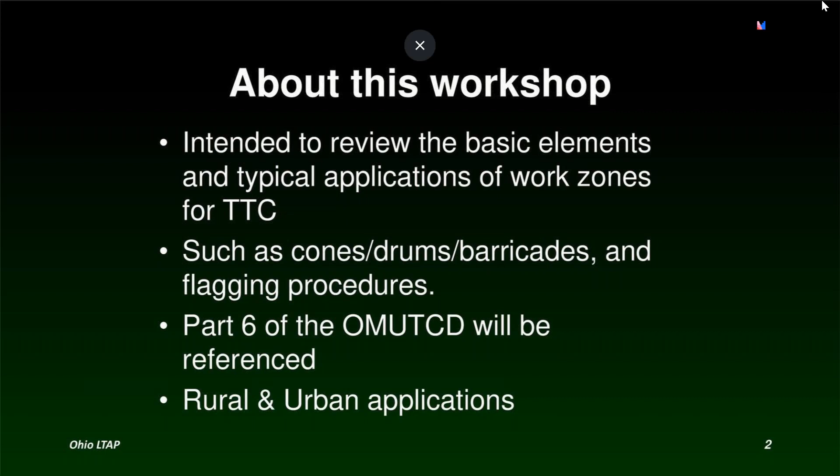So our learning objectives today: hopefully we'll be learning a basic understanding and awareness of temporary traffic control concepts, and we'll be talking about the standards involved for temporary traffic control. Standards is a very important word. It's a word that's tied to each of our typical applications in our temporary traffic control manual.

It has to do with a minimum level of safety that is part of each one of these 46 different work zone situations, depending on the type of road, whether it's a 2-lane road, maybe up to a freeway, and everything in between, and maybe intersections.

And then also we'll be realizing the importance of setting up our work zone properly, the way that this manual tells us to, so that we can make our work zones as safe as possible for both the workers and the motorists and all other road users, from pedestrians to the big trucks, etc.

So the way this webinar series is going to work, we'll start out talking about fundamental principles of temporary traffic control, and then the remainder of the day today will be focusing in on different traffic control devices and safety hardware.

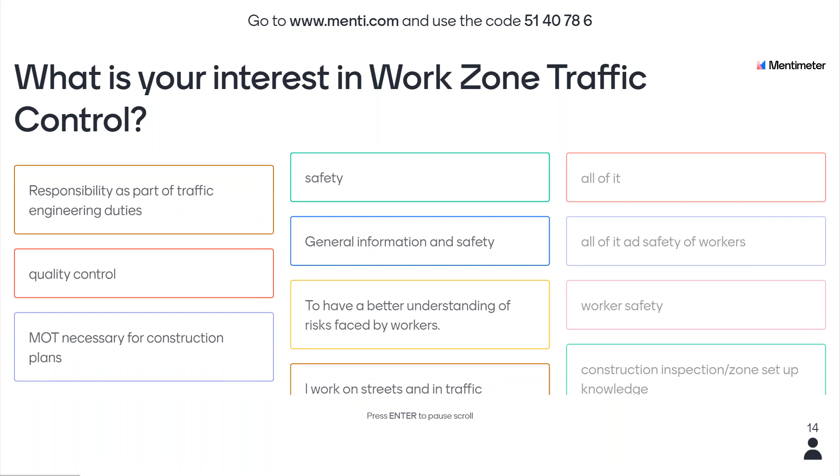What else? Construction inspection. Okay, we're getting a lot of answers. I work on streets and in traffic. All right, see a lot of safety. So we're definitely going to focus on safety, not just for the workers, but for the motorists as well, and how to determine the minimum level of safety for each typical application, and also how to enhance it with different devices, adding more devices, or in some situations having a police officer on hand with their lights turned on. So these are all examples of how to enhance safety. Quality control, very good. So these are very good answers.

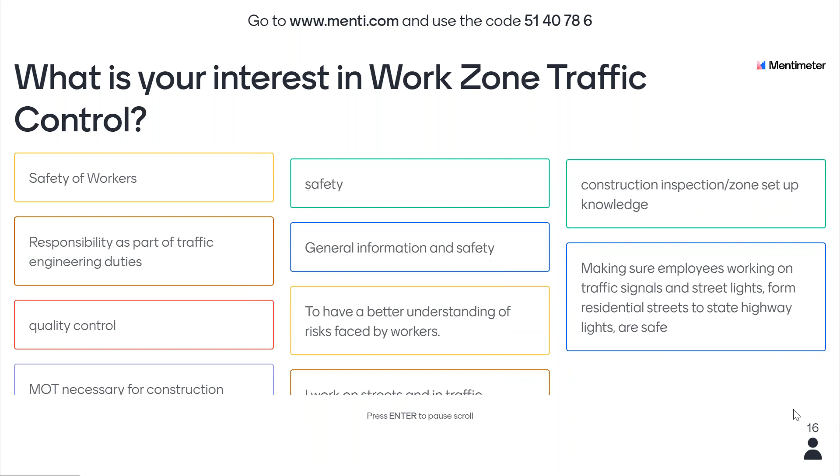Okay, so let's start out today with lesson 1. We're going to talk about the fundamental principles of temporary traffic control, and we'll be exploring some different reference manuals that you should all know about, and how to get your own copies of or view them online. And we'll talk about some roadway safety statistics when it comes to work zones, like crash statistics, what kind of crashes usually happen in work zones, and what we can do to lessen the number of those types of crashes.

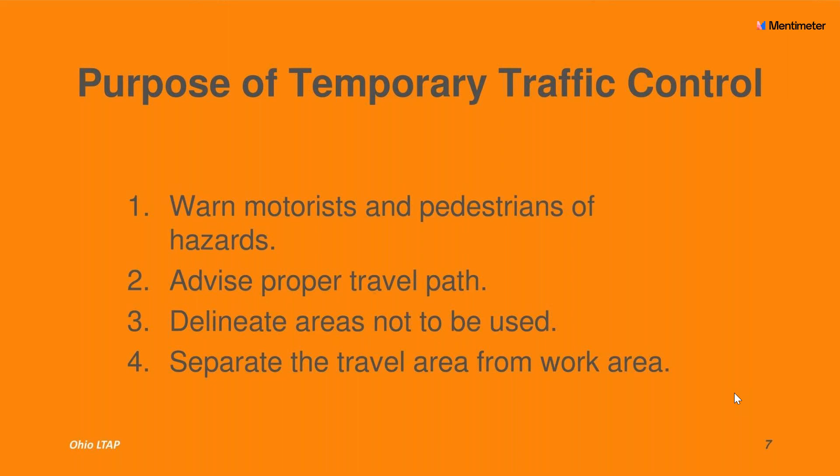First of all, what is the purpose of temporary traffic control? We got our top 4 purposes. One is we need to warn the motorists, pedestrians, or all road users that we are out there working on the roadways and streets, and they need to know that we're there before they arrive at our work zone, so they can adjust their driving, maybe slow down, pay more attention. We need to advise them of the proper travel path around our work zones, and we need to make sure we use the proper temporary traffic control devices to delineate the areas for them not to use, and separate their travel area from our work area.

We define temporary traffic control in our work zones as a system to communicate with road users to safely guide them through a roadway affected by construction, reconstruction, maintenance activities, utility operations, disasters, special events, and incidents. So sometimes we're not just using temporary traffic control for work zones, sometimes we have special events. Sooner or later we'll get back to normal life and have things like 4th of July events and Labor Day parades. Maybe some of you that work in cities or villages are familiar with setting up road closures to allow these events to take place.

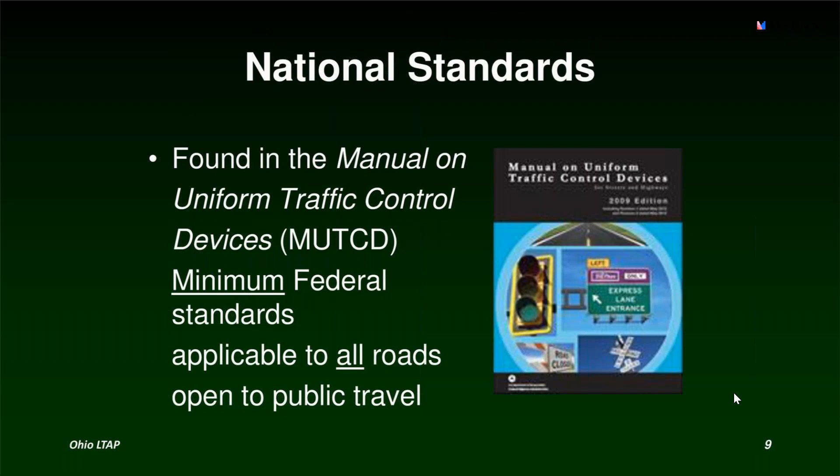So this is the manual we use to help us design all of our traffic situations. There's 9 different parts to this manual, and this is what it looks like in its entirety. You'll notice the latest edition is the 2012 edition, so that's 8 years old. And if you noticed, the national manual was the 2009 edition. They are working really hard to come up with the next edition, but they're doing a lot of research, they don't just want to simply roll out something like the one before. There's a lot of research projects to try to make some typical applications safer, like mobile operations. They want to study how to make mobile operations safer, and then take that information and put it into the typical application.

This is Part 6 of the OMUTCD, otherwise known as the Temporary Traffic Control Manual. Some people call it the Orange Book, but again, it's the 2012 edition.

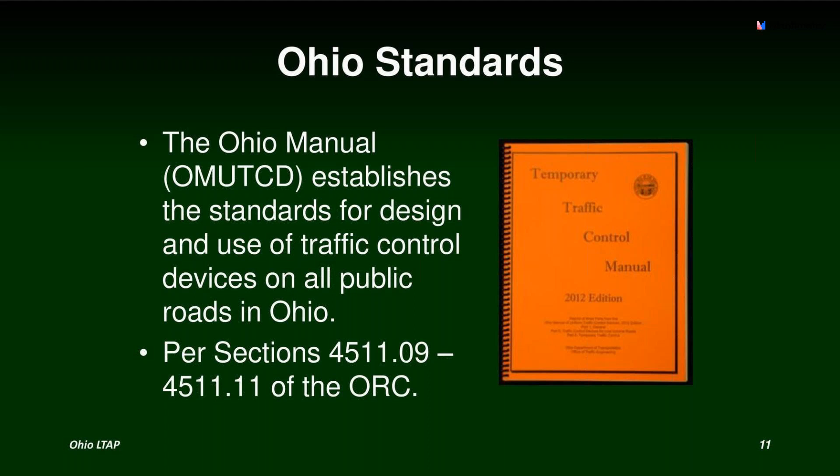The OMUTCD establishes the standards for design and use of traffic control devices on all public roads in Ohio. It says so right in the Ohio Revised Code, making it a state law, in sections 4511.09 through 4511.11. That part of the code states that local authorities shall place and maintain traffic control devices in accordance with the Department of Transportation manual and specifications for a uniform system of traffic control devices. So herein lies the legal reason we use the manual as the basis for the design of our work zones, and also the design of all of our traffic control situations, like school zones, railroad crossings, stop signs at intersections, or traffic signals.

It's also the basis for a lot of court cases. If there's a crash in a work zone, a lot of times the people in the crash want to sue somebody. So they hire an attorney, and that attorney gets his hands on the crash report filled out by local police, the state highway patrol, or county sheriff, and they review it to see if the work zone was set up the way the temporary traffic control manual wanted it to be set up. A lot of times these cases get settled out of court, but that's another reason why you need to set up your work zones the way this manual tells us to.

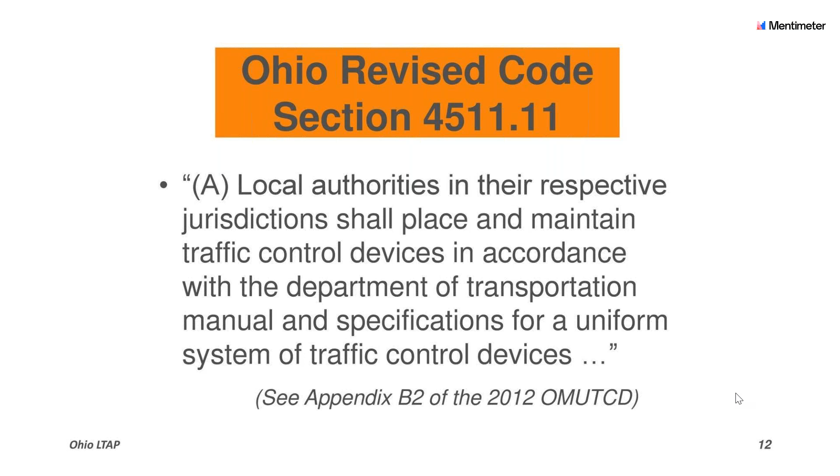To rehash what we've learned about the OMUTCD: it is published by ODOT. Part 6 of the manual deals with temporary traffic control zones. The manual receives input from a statewide committee made up of public and private sector officials, who meet on a quarterly basis. That's to make sure that if there were any changes to the national manual, we have a certain amount of time to update our manual to reflect those changes, because the OMUTCD must meet or exceed all of the specifications in the national manual.

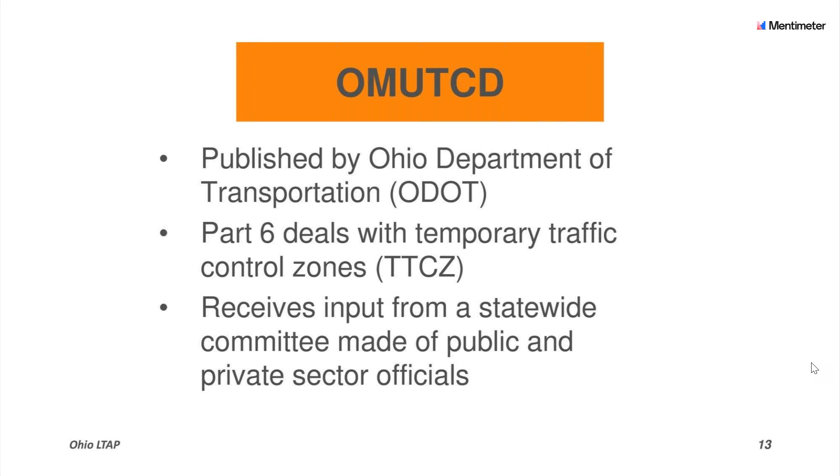As we get more familiar with the typical applications in the temporary traffic control manual, we'll see there's a drawing for each typical application showing the proper signs, the taper location, and other things like the space between signs. Then there's a page that goes with it detailing what the standards are—that's the shall condition, the minimum level of safety you must meet. So you shall install the signage and things like that per the standards. Then we can enhance the safety levels of your work zone by utilizing things mentioned in the guidance portion and in the options. The options usually detail different pieces of equipment or suggest the use of law enforcement officers on the scene and things like that.

We'll get some good practice with the standards, guidance, and options in this webinar. As we look at the manual, we'll see that all the standards are shown in large bold text, the guidance is usually shown in italics, and the options are shown in a smaller size text.

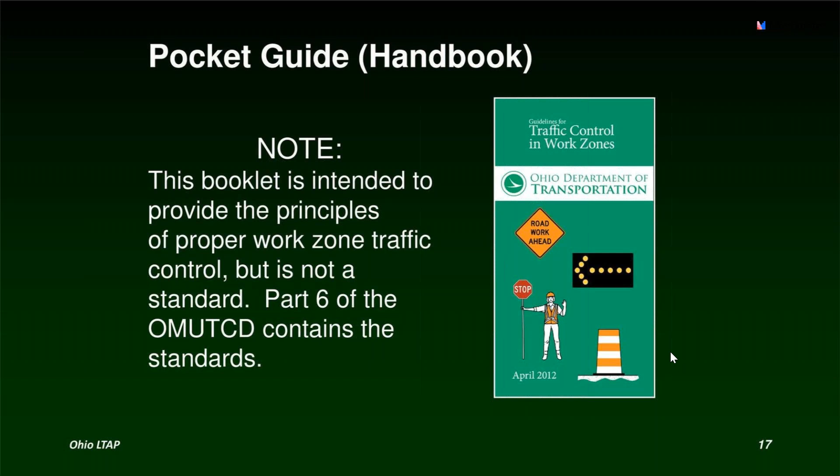Are any of you familiar with this, or have you used this before? Here's a question for Menti. You can say yes, I have the laminated flip book, or I use the app on my phone, or no—and how do I find these?

Ray, we're gonna have to work on getting more people to download the app. Yes, because it can always be there on your phone, and it'll always be up to date. Let's see if it's still there. They didn't take it down or anything, did they? No, it's there. They just published an update to it like two weeks ago on a Saturday.

Okay, so if I go to my Google Play and type in Ohio Work Zone, let's see what that does. I see ODOT. Someone told me that... I know on the Apple Store they just updated it two weeks ago on a Saturday.

All right, well, why don't you just show everybody where to find it? All right, I shall do that. That sounds like a good idea. Good.

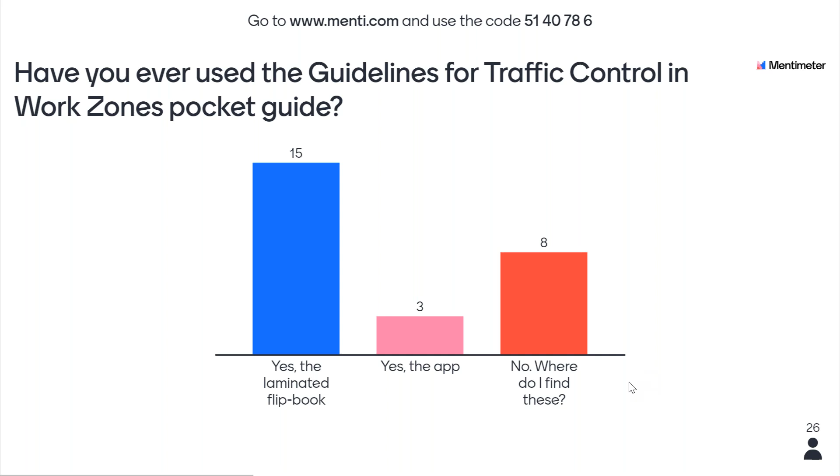All right, so if I escape out of here, can you see my screen, Victoria? The LTAP page? Well, I think my computer's running a little slow today because I still see... I see Mentimeter, but hopefully others are seeing your page. Maybe somebody could drop a comment in the question box and let me know if they're seeing your LTAP page.

There you go. Okay, so here's the LTAP homepage. As you can see in the top left corner, we are part of ODOT. So when you get to the Ohio LTAP homepage, you'll see this column on the right has lots of things to click on. If you go a little bit more than halfway down, you'll see Resources and Programs. If you click on that, you'll get to that page, and then you can scroll down. Lots of resources, you've got to scroll down.

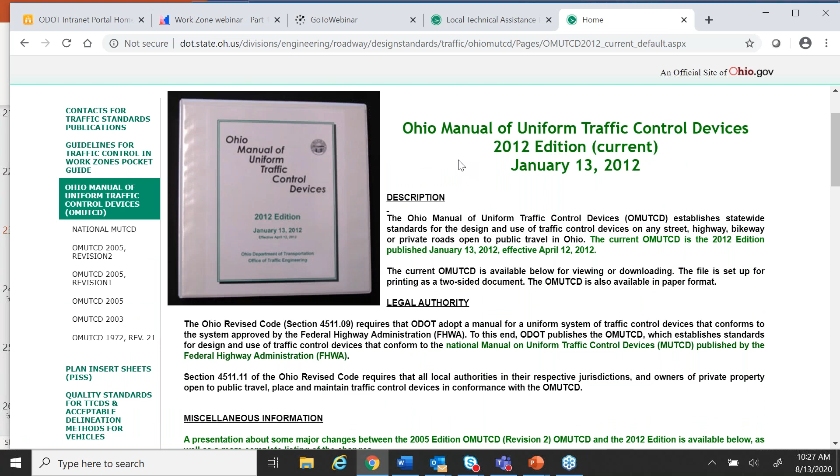And you'll see here's the Guidelines for Traffic Control in Work Zones smartphone app. You can click on that for information. And then you can also click on the booklet here, and it'll show you how to order these or download it. And then here's the direct link to the Ohio Manual of Uniform Traffic Control Devices. If you click on that, you can go to our entire page dedicated to the OMUTCD. If you scroll down to the bottom, you'll see direct links to each part of the manual, all 9 parts, and also the appendices. So those are some of the helpful resources you'll find on the Ohio LTAP page.

All right, let's get back to the Menti here. All right, so this little green flip book, Guidelines for Traffic Control in Work Zones, has got a lot of helpful information in it. So if you open it up, you'll see different pages, showing pictures of the latest specs for different devices, like our different types of cones, drums, and barricades.

There's also, on page 17, this very important table here. And that's not full screen, is it? There. So this table is very important for setting up your work zones. It shows a chart that goes into detail about how far apart your series of signs should be, in feet. The next one is the spacing of your cones or channelizing devices. And then the big table at the bottom helps you figure out the length of your cone taper.

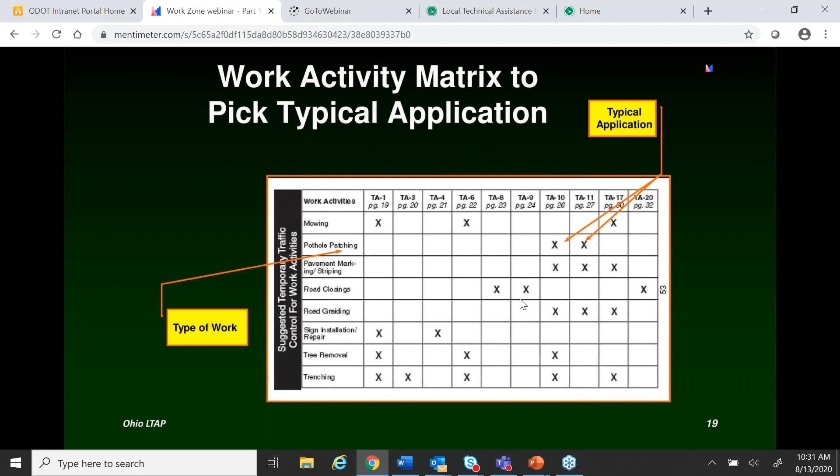If you want to order copies like I just showed you, you can go to our LTAP website and look at the order form, or call us, or call the ODOT Office of Contracts. Last I checked, these are about $3 each, but if you order a whole bunch, the price per copy goes down. The phone number is 1-800-459-3778. And again, that's not just for these booklets—if there are other reference manuals you want, you can order copies of them too through that number.

Local standards. This is definitely going to come in handy, especially for those who work in the cities. When I worked for the city of Columbus, after first working at ODOT, I discovered that our temporary traffic control manual is great if you work for the state because all the pictures look like state routes. But it didn't take long to figure out at the city that there really are no typical applications that look like High Street, Front Street, 3rd Avenue, or 4th Avenue.

Can you guys think of some differences between state routes and local streets or roadways? Think about it for a minute.

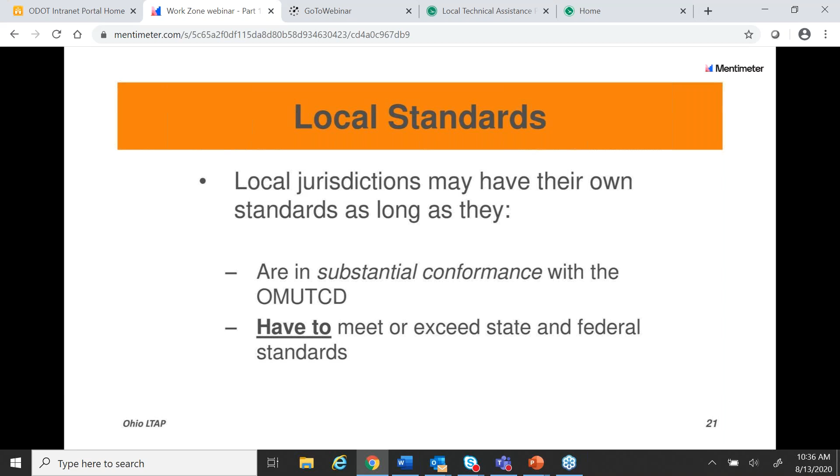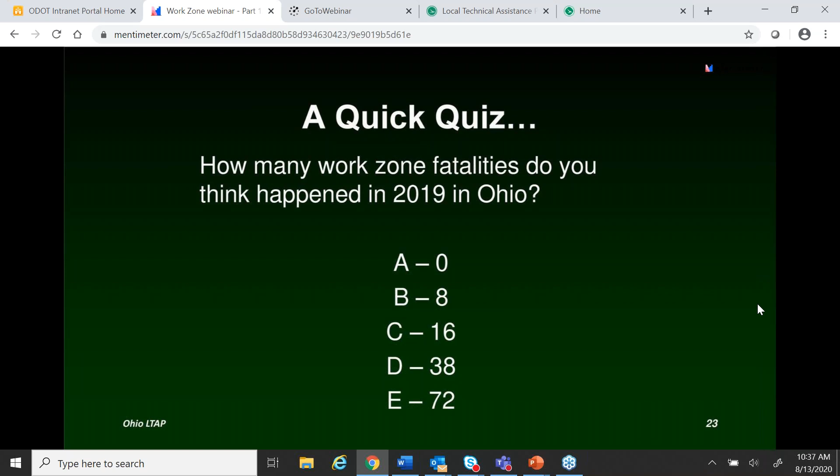Okay, let's talk about some safety concerns, and we'll look at some crash statistics. I have the latest crash statistics from 2019 about crashes in work zones. Try to think about, I know it's not a fun question, but how many fatal crashes do you think happened in Ohio's work zones last year? Would it be 0, 8, 16, 38, or 72? I've got a Menti question here, so how about you all take a crack at guessing how many fatal crashes occurred last year in our work zones?

I sure wish it was 0. That's our goal. Would you tell them a little bit about that initiative? Yeah, there's the Toward Zero Deaths initiative, and we are actually working with the safety section. I've been emailing with them even this morning on setting up a webinar to further explain what it is and how it's working, or is supposed to work here in Ohio. But it's the goal of getting to 0 deaths. They have looked nationally, and there's a national goal for flying on airplanes that is 0. They feel there really is only one acceptable goal here, and anywhere across the world for traffic fatalities, and that's 0. I definitely wouldn't want it to be somebody from my family, and I know everyone here wouldn't want it to be anybody that they know or love, or even a friend. Nobody would wish that on another human being. So that's what we all want to strive for.

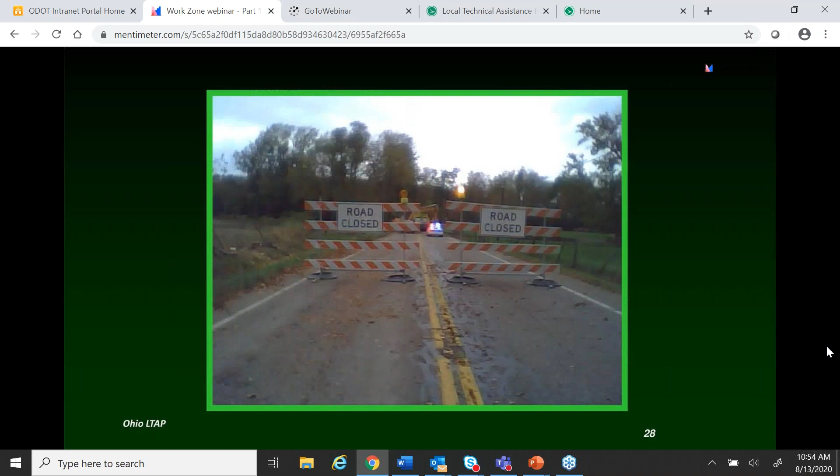So if we look at one of our projects on a 2-lane rural road, we had a pretty good project there to repair the roadway, and we couldn't get all the work done in one day, so we had to leave the roadway closed overnight.

So we put up our type 3 barricades to let people know that our roadway was closed. However, when our workers arrived the next morning to get to work to finish the job, this is what they found in their work zone.

So someone in a minivan had gone around the barricades, and they quickly found out as to why the roadway was closed, and they got stuck. So they had to abandon ship in the middle of the night. How about that?

And so we had to call, as you can see, we have our state highway patrolman arrived on the scene to help us take care of this matter.

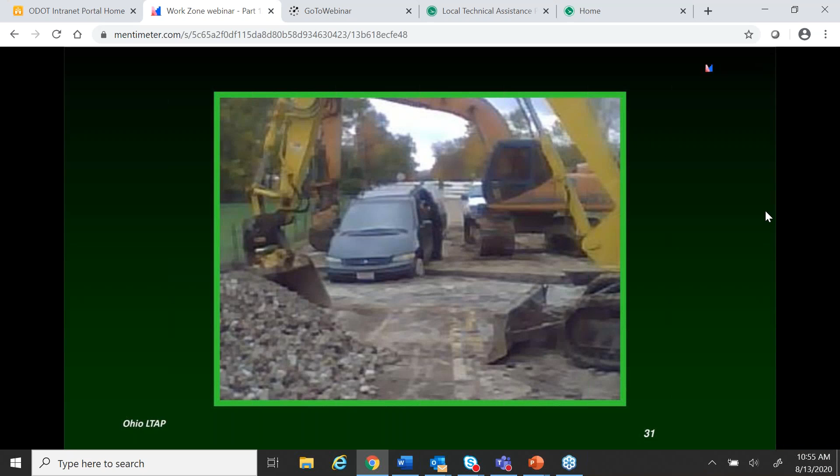So that was kind of stupid.

You know, I must say, in our experience working on 2-lane rural roads, the people from the county and townships can back me up on this: people who live on 2-lane rural roads, especially the lower volume ones, tend to think they own the entire roadway. So it's hard for them. Those are the situations where we get people showing they're more brave, trying to get through a work zone on a road that's closed. I think people from the county and township can chime in on that if they want.

Our traffic control devices are essential to highway safety. Motorists recognize these subconsciously. For instance, when a motorist is driving down the road and sees an orange sign, no matter what it says, as soon as they see it they're supposed to automatically, in a split second, realize a work zone is coming up.

Motorists rely on these devices to be in place. We need to give them advance warning, especially on our higher speed roads, so they're able to slow down. They really need that advance warning. So what would happen if we didn't have our traffic control devices? How else could we communicate? There could be confusion, chaos, or a higher chance of a crash happening.

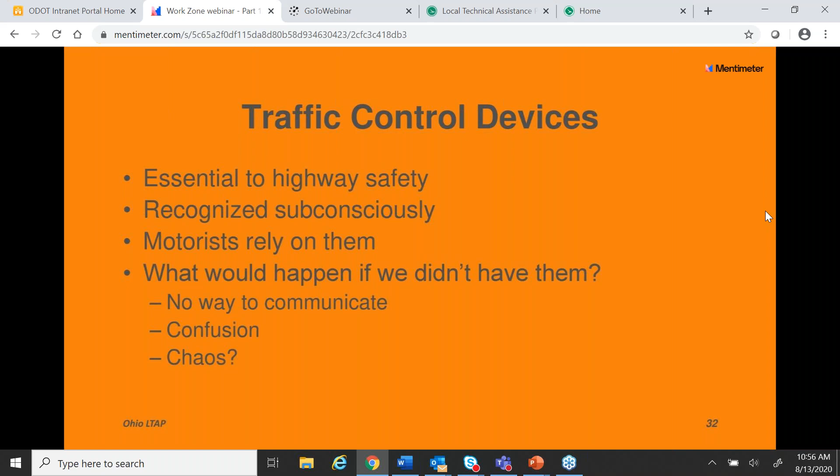We have certain requirements for our traffic control devices. We don't use them unless there's a need for them to be utilized. They must command attention, and our latest devices have undergone a redesign in the last 4 or 5 years with more retro reflectivity, and some are even larger than they used to be. They need to convey a clear and simple message, or be a symbol of what's going on—like the symbol of a flagger, very clear and simple. And they must be placed to give motorists adequate time to respond the way we need them to.

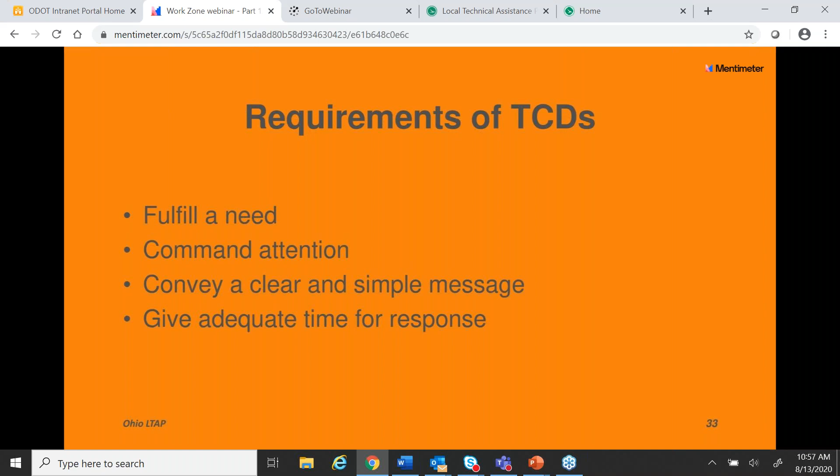The name of our manual is the Ohio Manual of Uniform Traffic Control Devices, so we're striving for uniformity through standardization. That's a mouthful, isn't it? Let's all say that: uniformity through standardization. By doing this, we're promoting better recognition and understanding of our devices, more consistent interpretation, more rapid driver response, motorist respect, and even reduced traffic control costs if we're all utilizing the same signage and devices instead of inventing a new sign that says the same thing, right?

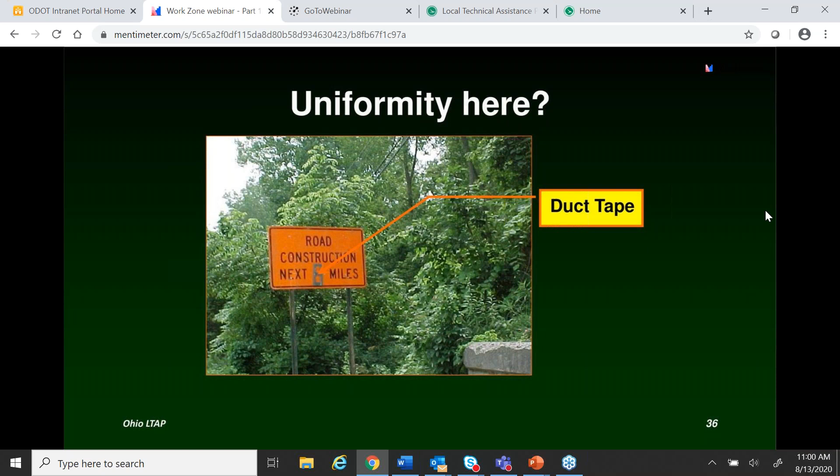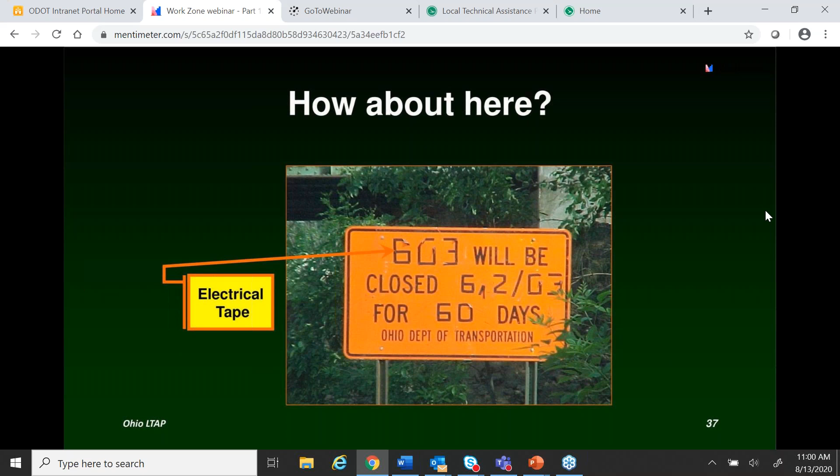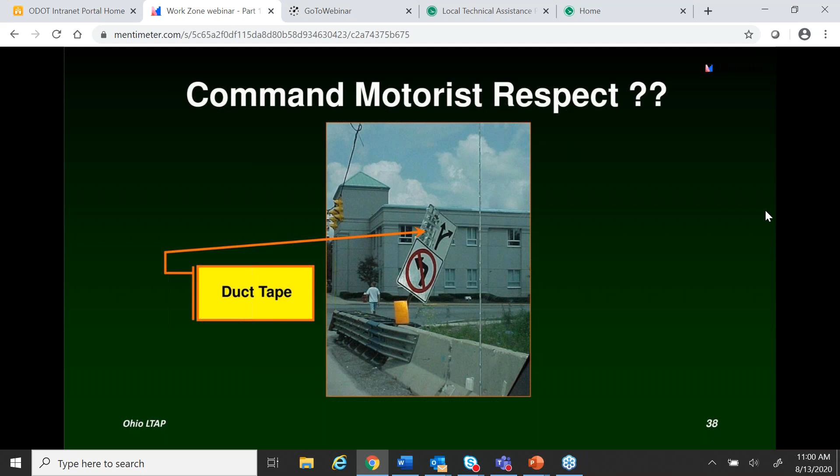So we need our traffic control devices to be uniform in their design, their application, and location as we strive to achieve our uniformity through standardization.

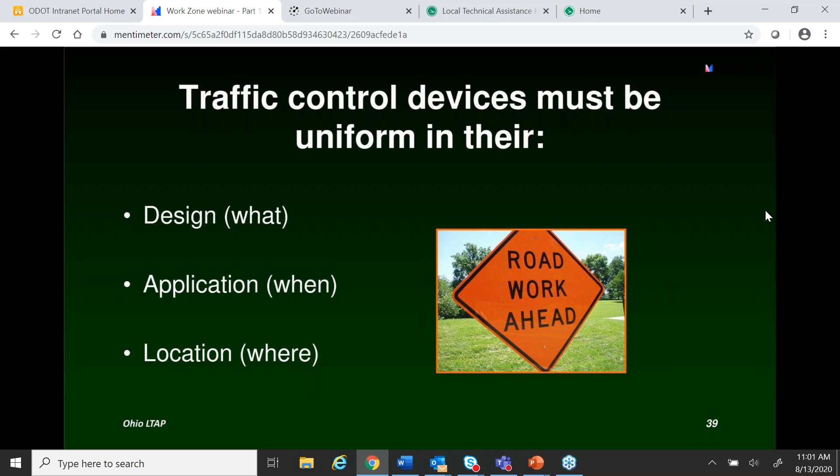So what do I mean when I say traffic control devices? I'm talking about our signs, our channelizing devices, our cones or drums, arrow panels, portable changeable message boards, pavement markings, and barriers and barricades.

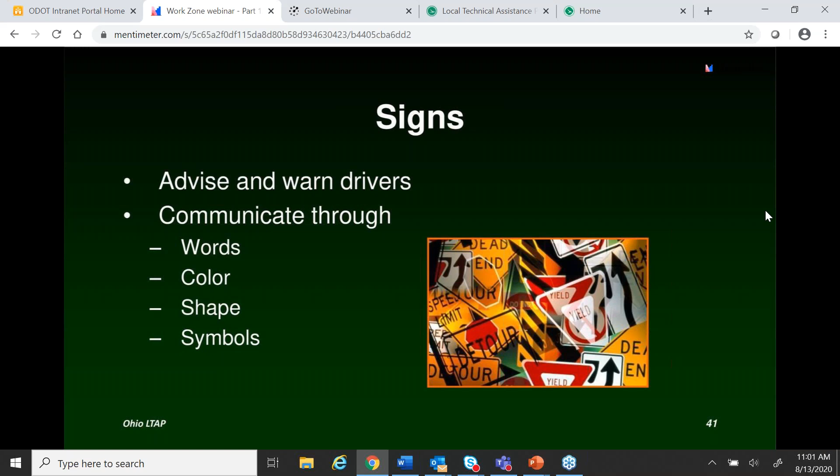Let's take a look first at our signs. What do the signs do for us that we place in the advanced warning area of our work zones? They advise and warn drivers. They communicate a message to motorists in 4 ways: through their words, color, shape, and symbols. And they communicate the same message redundantly through their shape and color.

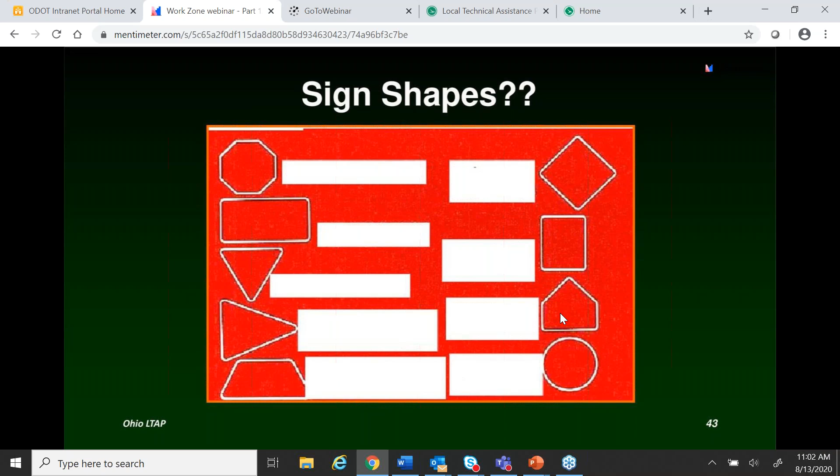Let me go ahead and put the answers up here. The one in the top right is a diamond-shaped sign. It could be a yellow diamond-shaped sign or an orange diamond-shaped sign, but in both situations, they are warning signs. Of course, the rectangular sign is a regulatory sign, like your speed limit sign, no parking, or right lane must turn right, those sort of signs. Those are regulatory. If you don't obey those signs, you're getting a ticket, right?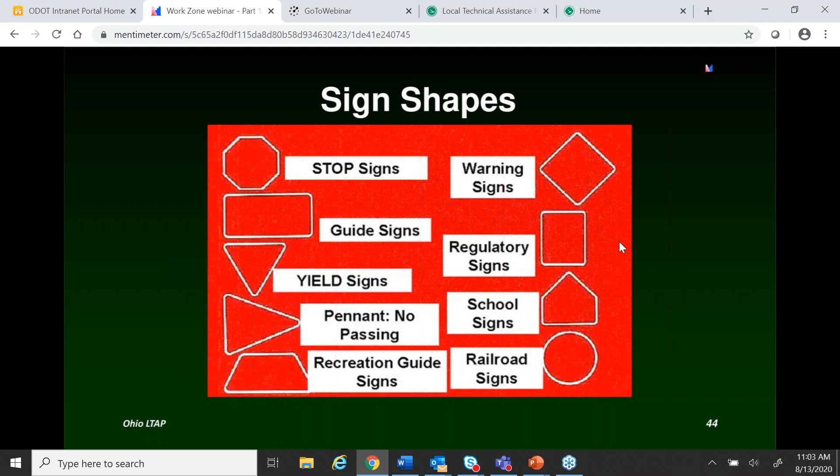Also, the colors of signs send a message. So we've been busy buying signs for townships all over the state, especially for their curves. One of the most famous signs we buy is the advance warning sign for the curve ahead. It's a yellow diamond-shaped sign with a curved arrow on it, so that's definitely a warning sign.

Anytime you see a yellow sign, you need to pay attention to it. It's the same with red and orange, but we really need to pay attention to the warning signs. Of course, red is prohibition, regulatory—it could be stop or do not enter, things like that. If you're on a freeway, you might see some blue signs for motorist services guidance, or rest area signs, things like that. Brown is for recreation, cultural interest, and of course orange is the international color for work zones ahead, or for construction or maintenance.

Regulatory signs are white, like your speed limit. And pedestrian crossings, bicycle crossings, and school zones have their own special color called FYG. Does everybody know what FYG stands for?

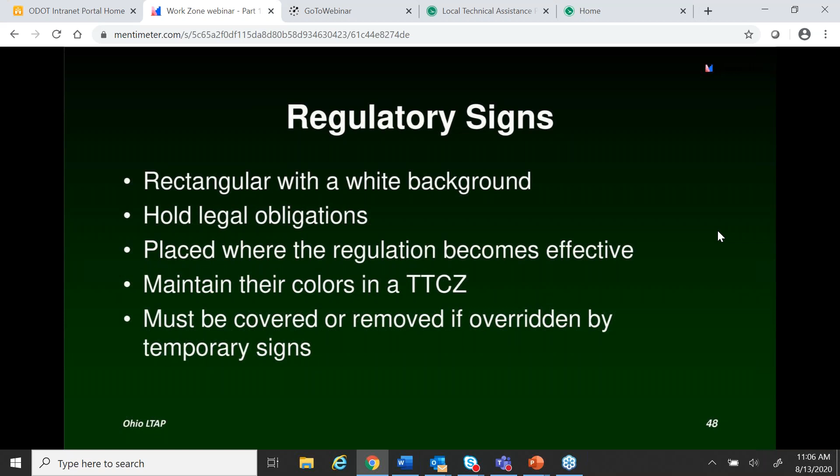We have different types of signs: regulatory, warning, and guide signs. Let's talk about our regulatory signs first. They are the rectangular signs with a white background. They hold legal obligations or indicate where the regulation becomes effective.

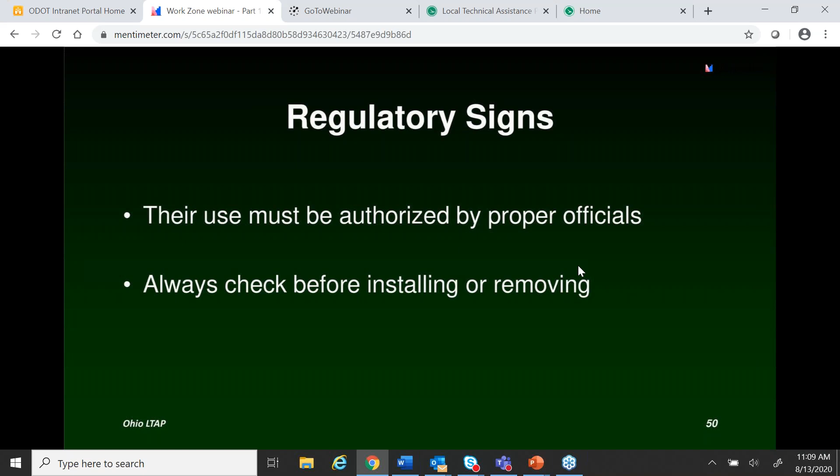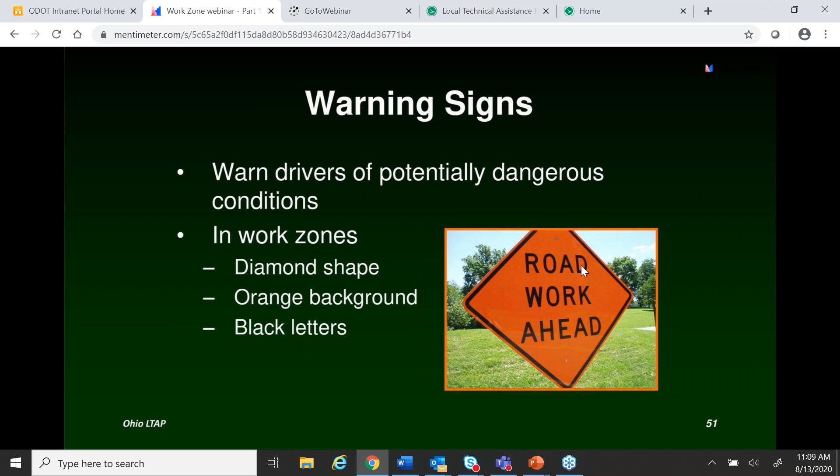Then we have our warning signs that we're all more familiar with, our orange diamond-shaped signs for road work. So we use these signs in our advanced warning area of the work zone to warn drivers that we are out there and it's a potentially dangerous condition ahead.

Let's take a look at some of our work zone signs, and you can tell me if you have these in your arsenal of signs. So we have some symbols that I talked about. This one here, the flagger sign, you should all, if you routinely do set up a flagging operation, you need to have this sign, not the old sign that says flagger ahead on it. It's been studied, and this one results in a safer flagging operation.

And then we have this sign here, the man with the shovel sign. We'll see that one of the places to use that sign is in a mobile operation, and it would be attached to the back of the shadow vehicle. That lets the motorists know that there are people working in front of that big truck that they can't see as they approach from behind. Like I said before, if we tell people that there's people in the work zone, they behave a lot better. So this definitely adds safety to your mobile operation.

Then we have signs specifically for shoulder work where you're not blocking a lane. Another one here, I think everyone should have this sign, be prepared to stop. This sign is called out a lot of times as an option or guidance in certain work zones. One of those is flagging. When you look at the typical application for flagging in the drawing, you don't see that sign, but when you read the notes page, you'll see it's called out in two places to use, and that's to add safety and more warning to the motorists.

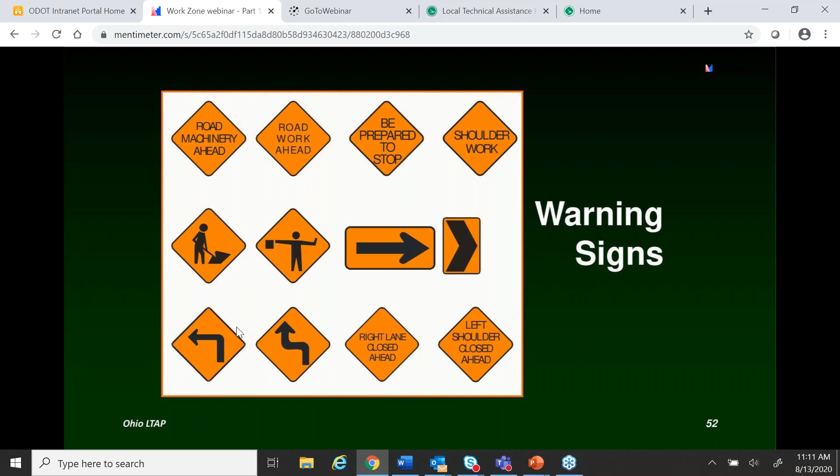So if you are working on a 55-mile-per-hour 2-lane roadway, you need to have this sign, and you add it to your sign series. So instead of 3 signs, you would have 4 signs in each direction. Definitely adds safety. So there's some of the signs that we have out there.

So for instance, here we have our typical application number 10, our flagging operation. And just like all the other typical applications that involve a sign series, it calls out the spacing of the signs here with the letters A, B, and C. So how do we convert that to a distance in feet?

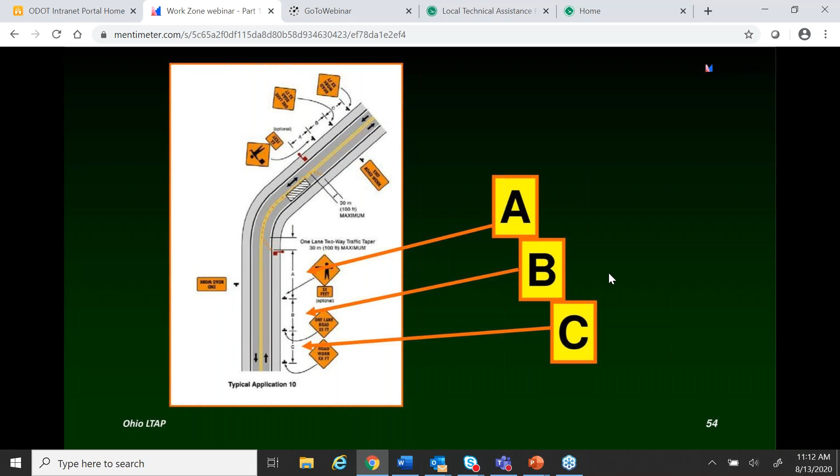Well, we go back to something I showed you earlier, and that is this table found on page 17 of our little green flip book. This table tells us how to determine the values of A, B, and C. So if you're flagging on a 2-lane rural road, we look at the road type, and we'll see that those signs need to be 500 feet apart.

Now, if we work in a city where it's 35 miles per hour, then we go up to urban, low speed, which is 40 miles per hour and below, and we'll see that those signs can be 100 feet apart. So that makes a really big difference, doesn't it?

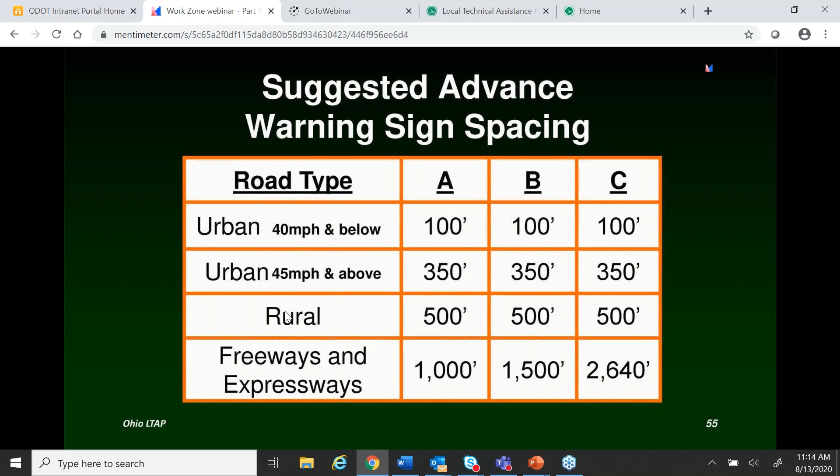Now, if we're doing a right lane closure on I-71 and it's 65 miles per hour, then we'll see that A, B, and C have different values. So A is 1,000, B is 1,500, and C is a half mile, 2,640. So basically, all of your roadways can be broken down into 4 types of roads. It's either urban low speed, urban high speed, rural, or express freeways and expressways.

We utilize a 3-step signing package for a reason in most cases. The first sign people see, the road work ahead sign, is used to get the motorist's attention. The second sign tells the motorist what the situation is that lies ahead, so sometimes it's right lane closed or 1-lane road ahead. The third sign tells the motorist what we want them to do, so merge left, or if it's the flagger symbol sign, that means be prepared to do what the flagger is going to tell you to do.

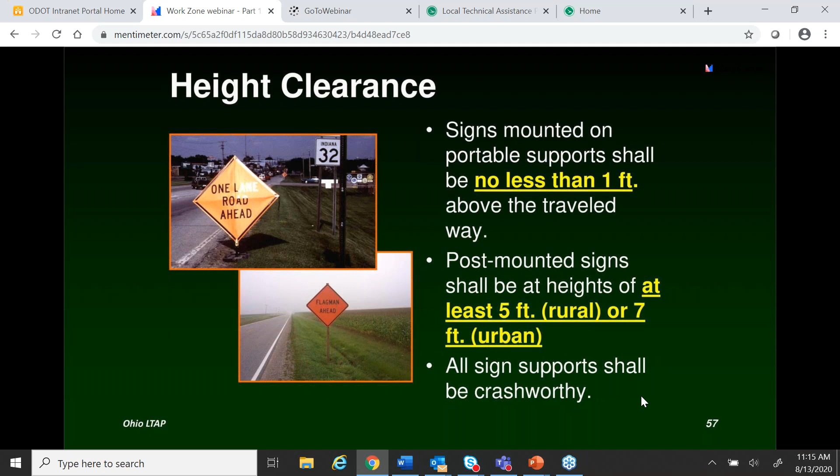We also have certain specifications for the height of our signs. They need to be no less than 1 foot above the traveled way, so your signs can't be on the ground. They need to be on some sort of a post or a sign stand. That's for most of your roadway maintenance activities where you're going to be gone at the end of the day. But if you have a long-term project, then you can have post-mounted signs. Depending on whether you're in a rural or urban area, the height needs to be 5 feet minimum above the traveled way in a rural area, or 7 feet in an urban area. And of course, your post-mounted signs need to be crash worthy.

So if you don't have flags, how else can you draw more attention to your sign? One way is to put your newest, prettiest cone right beside your sign, and that draws attention to your sign just like a flag would. Of course, if you're on a long-term project, you could always put flashing lights or something like that on your sign.

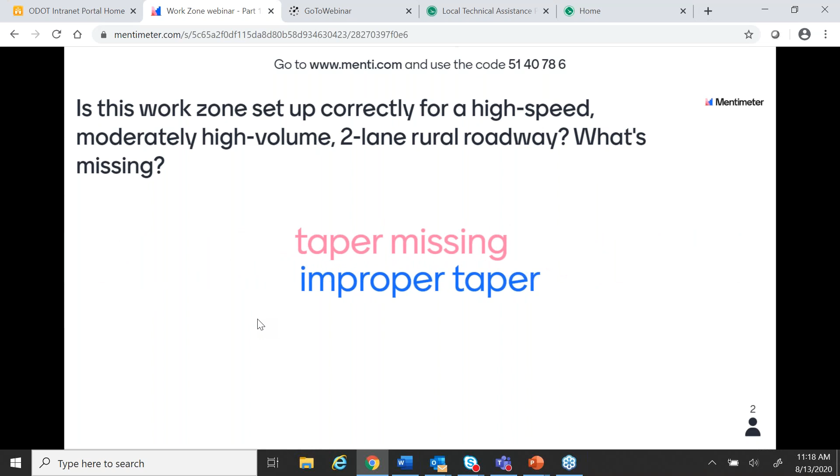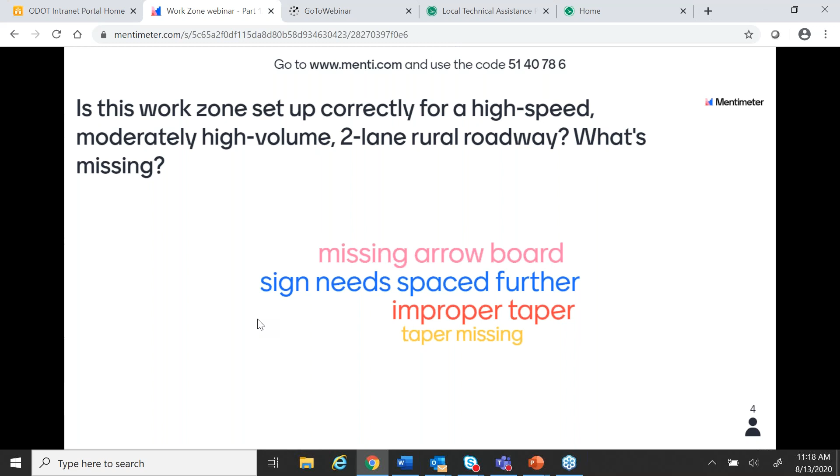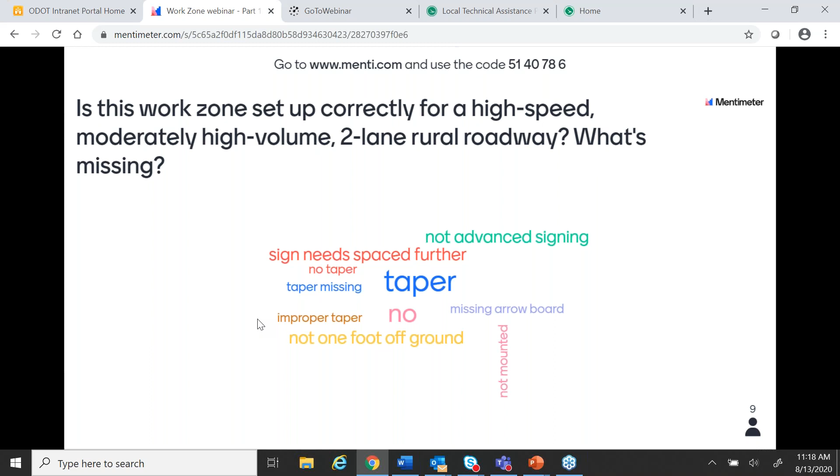Okay, the answers are rolling in. Where's the taper? Sign needs space further away. You guys are on a roll now. The sign is not mounted, it's on the ground. Good catch. Arrow board - sorry, no arrow, we don't want an arrow board in this situation. So that's one thing I need to talk about. This is not a multi-lane roadway, it's just a 2-lane, 2-way roadway. Let's see, flagger - finally someone says flagger. Yes. Flagger needed, need flagged, okay. These are very good answers. All right, need 500 feet. Good one.

Okay, so what I was shooting for here was that the crew is out there working, they're in a work zone. One of the main takeaways of this course is that your work zone should be based upon the design of one of the typical applications. There's only one typical application with all the parameters I listed that is suited for this situation, and that's the flagging operation, typical application number 10, because they are not a mobile operation, they're fixed. They're going to be in that one spot for 4 hours. It's not a low volume road, I said moderately high volume, and it's high speed.

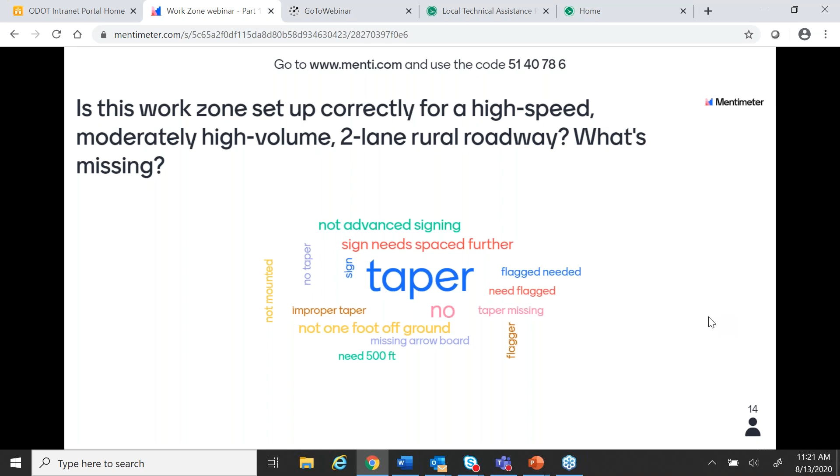So, someone said arrow board. One of the things we learn is that on a 2-lane rural road, we do not use a flashing arrow board, because when a person sees a flashing arrow, they think it's okay to go around them at any time. In this situation, if they did that, you could be causing a head-on collision with people coming the other way. That's why in a flagging operation, we don't use an arrow board. We'll get into more detail on that when we get to that part of our webinar series.

So very good. I think that's the end of this one. So I'm going to have to transfer back.

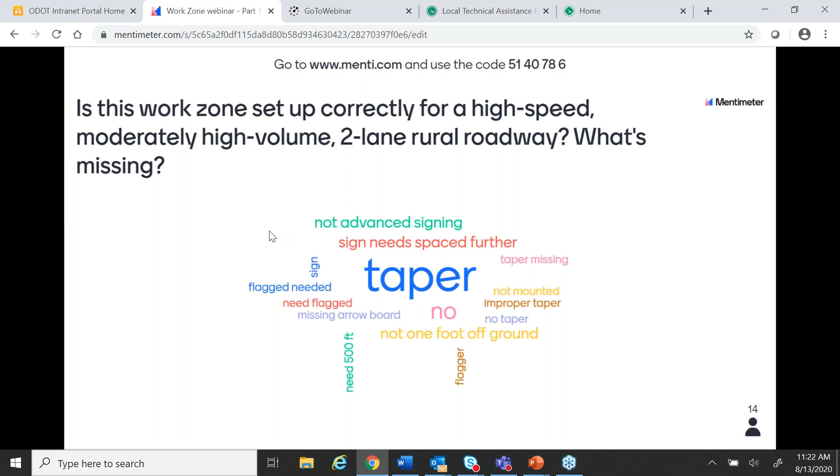So one thing I learned about the Menti software, you can't have more than 100 slides in your presentation. You got to break it down. I got to hurry up, don't I?

All right, so some more about signs. Let's look at this one. Is that the proper height of the sign? No. In an urban situation, your stop sign needs to be a minimum of 7 feet above the traveled way.

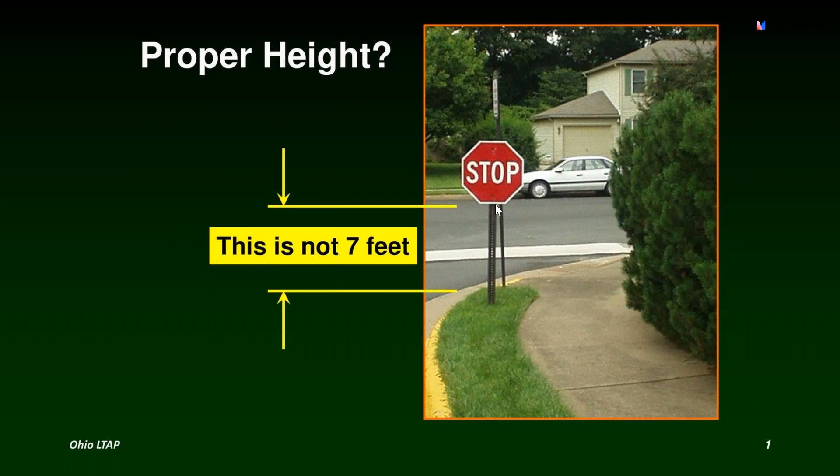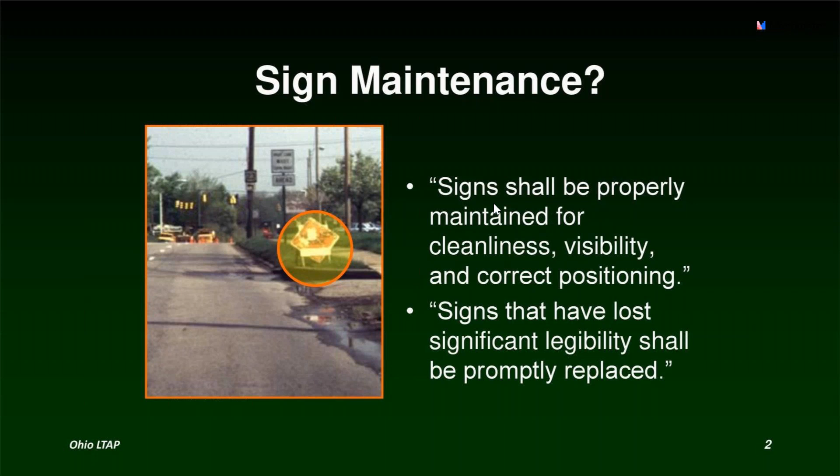How about these signs? Are these signs good to go for this year and next? So the answer is no. These signs do not meet the latest specs for legibility and for retroreflectivity. So they need to be promptly replaced.

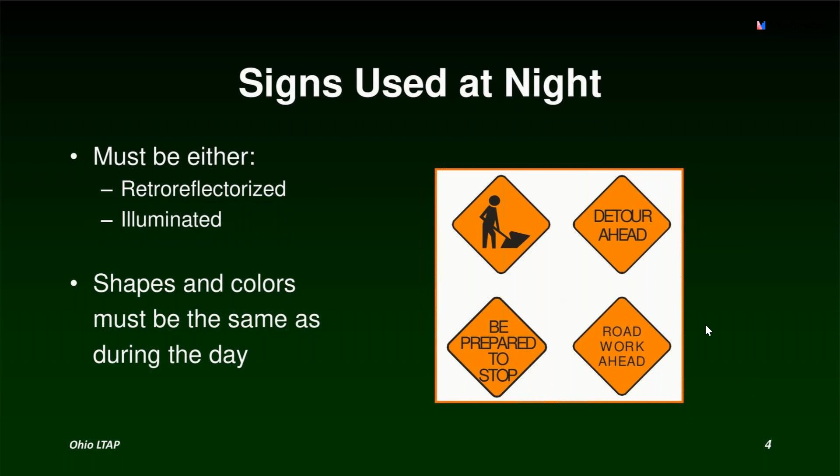How about these? When you work at night, how many of you work at night? When you work at night, you use the same signs that you do during the day, but they have to meet the standards for retroreflectivity or be illuminated.

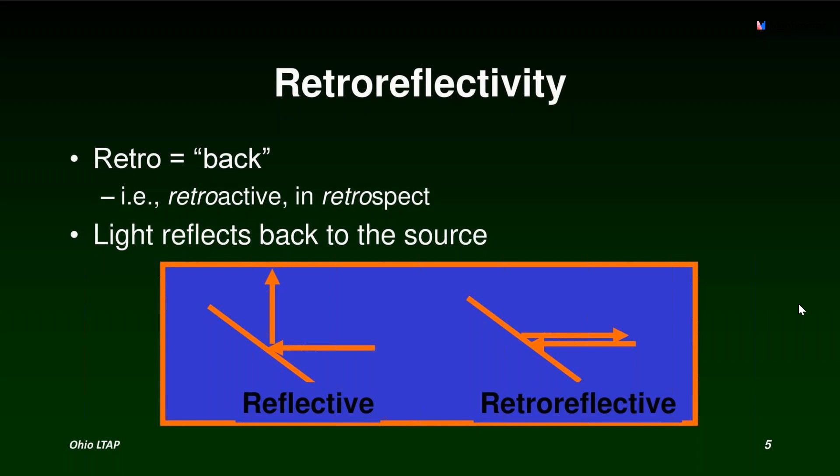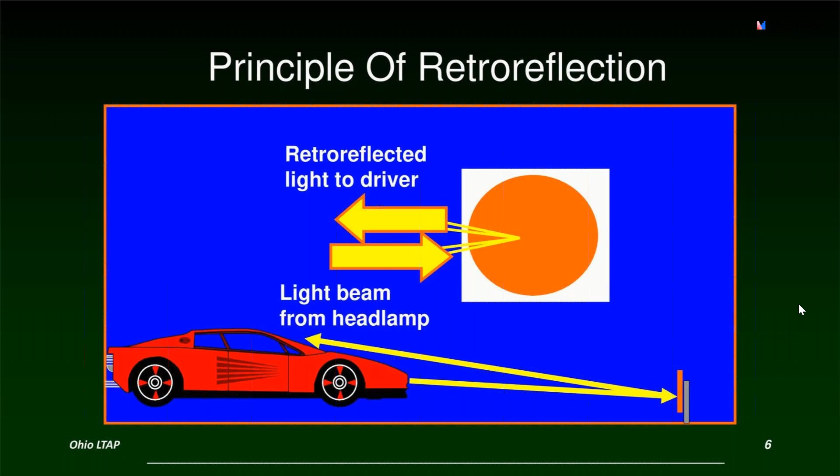So what's retroreflectivity? It means that when the headlights hit the sign, no matter what angle, they reflect back to the source of the light. So here we have, we'll use my car as an example. We have the car light hitting the sign and bouncing back directly to the motorist. Okay, that wasn't my car.

Okay, so what is the principle of retroreflectivity in action? Well, if you don't use a retro-reflective sign and you're working at night, your signs will literally disappear at night. That's the whole reason behind retro-reflectivity. And of course, our standards for retro-reflectivity have been updated in the last 4 or 5 years so that they're even brighter.

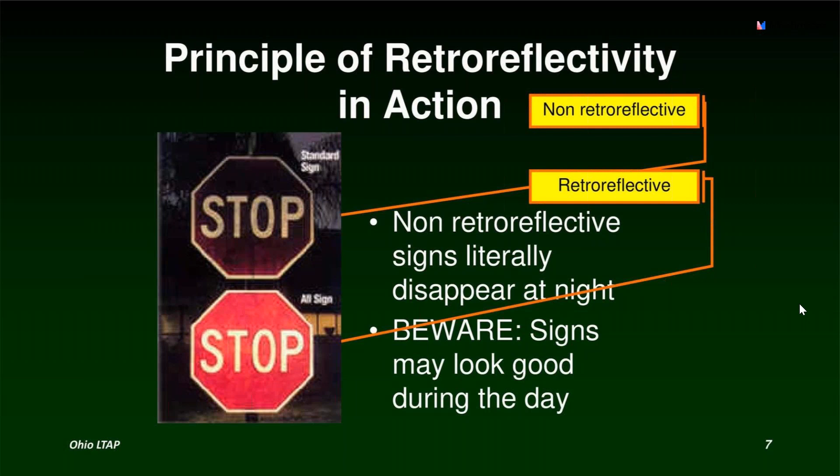5-minute warning, Ray. Okay. Then we have our channelizing devices. There's different types of cones and drums, but we use these to direct traffic from one lane to another, and they are also retro-reflectorized for night use.

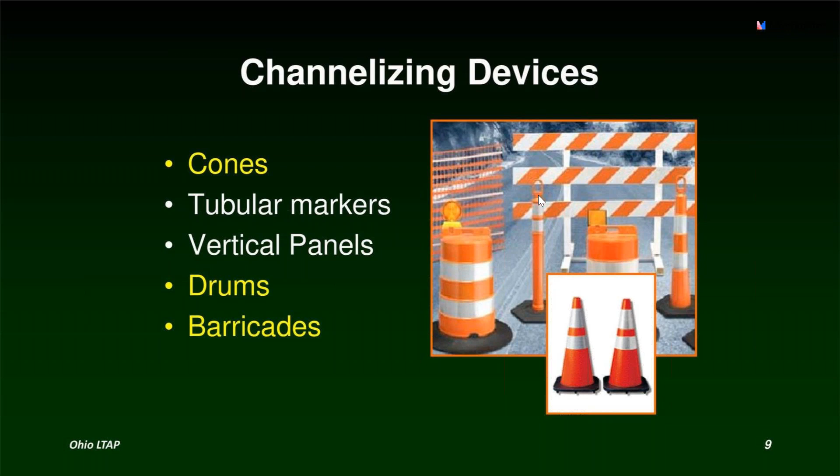Here's some pictures of different channelizing devices. Down front, we have our standard 28-inch cones with 2 bands of retro-reflectivity. We see our orange drums over here, the Ohio State flower. This is what they should look like. We have our grabber cones here and our barricades.

So if you're using cones, that means that you're out there with the cones. So these are typically for operations that are 12 hours or less. We don't usually want to use these cones when you're not there overnight. You should be using drums in that situation.

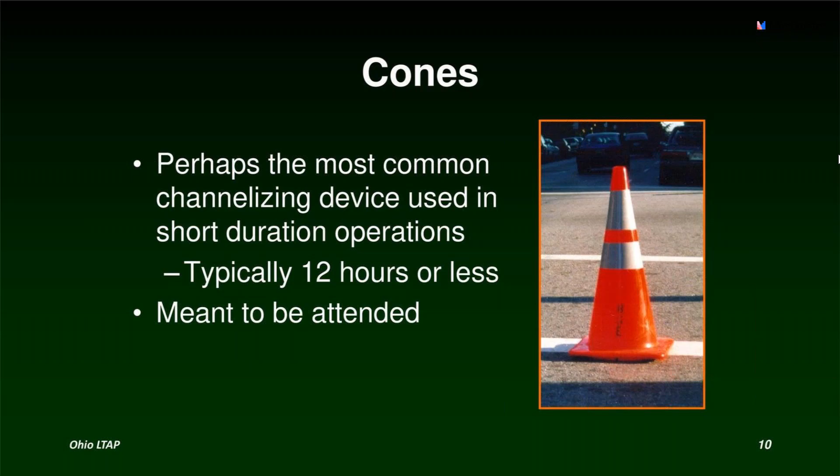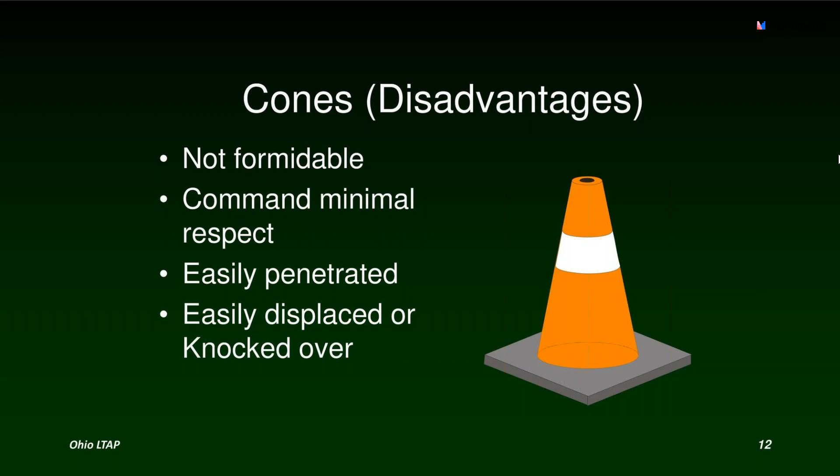So several good advantages for using cones. They're easy to place out there and they don't do any damage to cars, but there's also disadvantages. They're not as respected as the drums. It's easy for drivers to drive into the work zone, easily knocked over with wind and stuff like that.

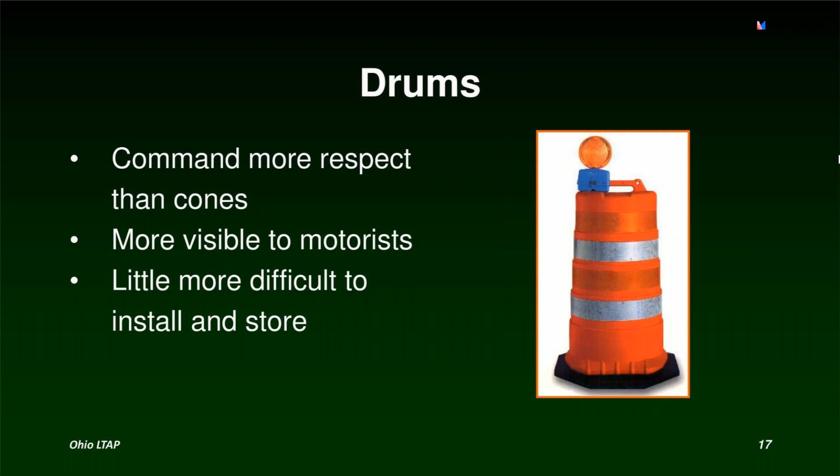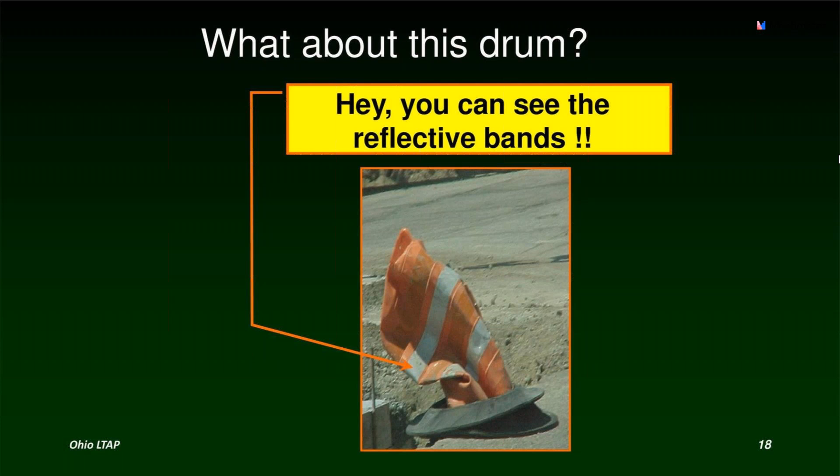Here's the drums. They command more respect and are more visible to motorists, but they are more difficult to install. How about this one? Is this drum still good to be used? Well, the answer is no, because we want the shape to be instantly recognized by the motorist.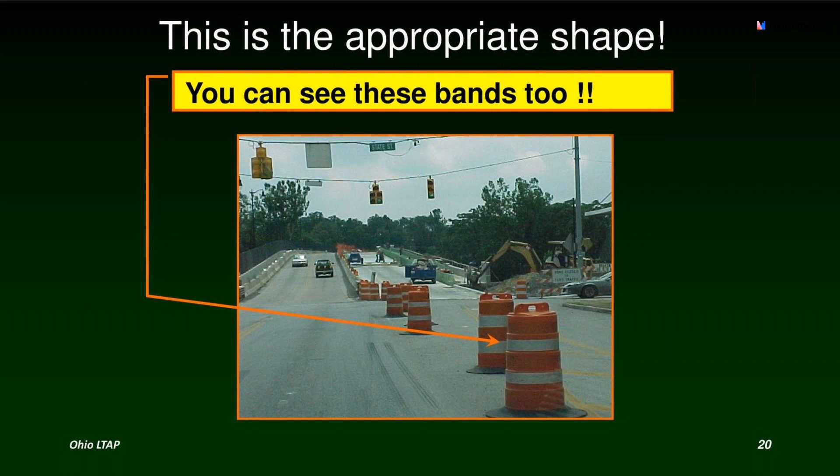So this is the shape of drums we're shooting for. If we take a closer look, we don't like how these drums are placed. One's out of line, so we need our drums to be in a straight line so it doesn't cause driver confusion. Somebody might think they can drive into that work zone.

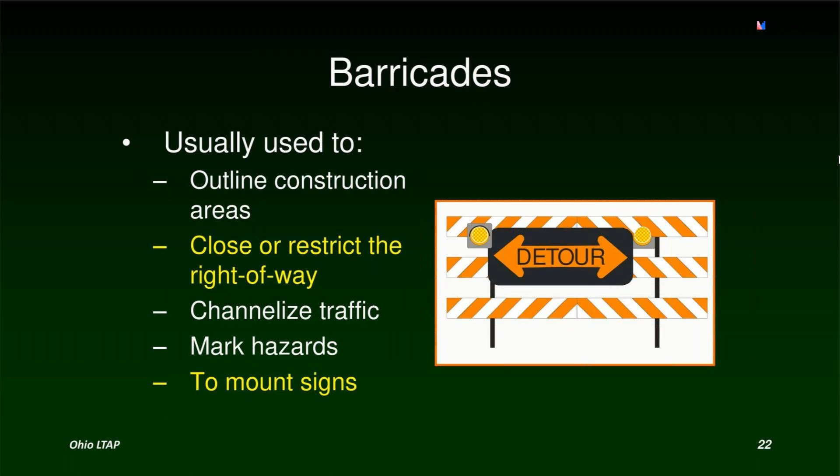Then we have barricades used for different reasons, one of the main ones being to close a street down, and we can hang signs on these. We have type 1, with a single rail, maybe for low speed, low volume roadways, and type 2 for higher speeds. But anytime we're closing a street, we use a 3 rail for road closure.

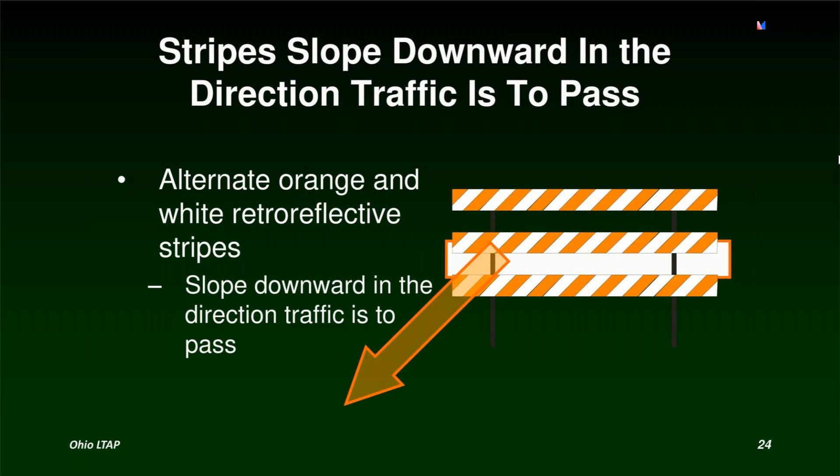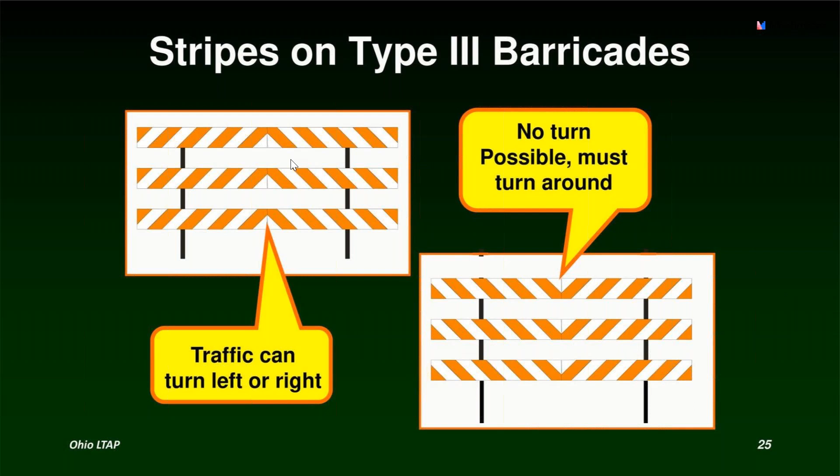The stripes on a barricade actually mean something. They're placed sloped downward in the direction that traffic is to pass. So the bottom right one shows how we'd close a street down by putting it together to make a V shape with the two barricades placed together. The top left shows a situation where motorists could go on either side of the sign, and the barricade might damage a vehicle if it's to run into it.

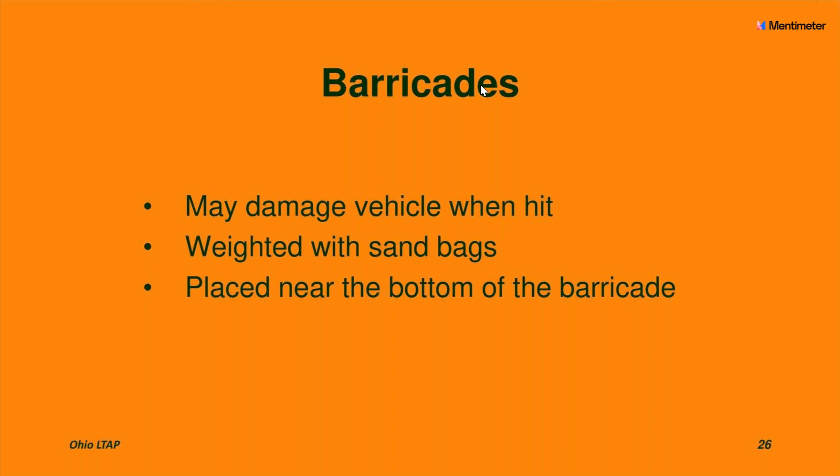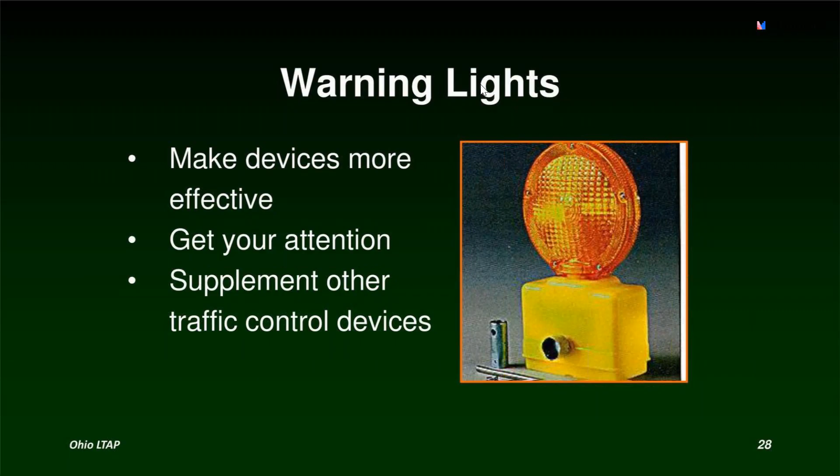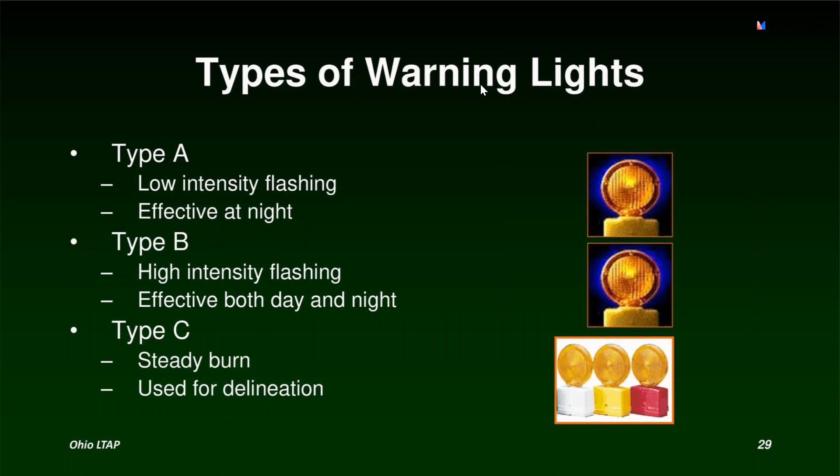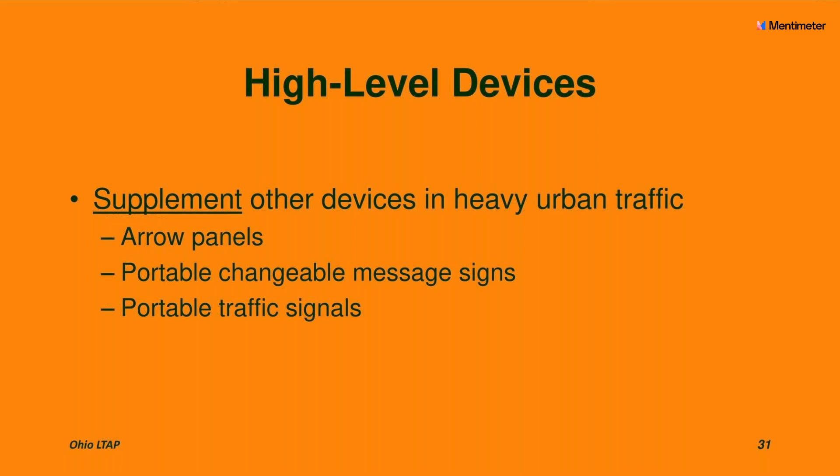Then we have other devices used in heavy urban traffic. If you're in a city, I'm sure you have heavy urban traffic, so we use other high-level devices: arrow panels, portable traffic signals, and portable changeable message signs.

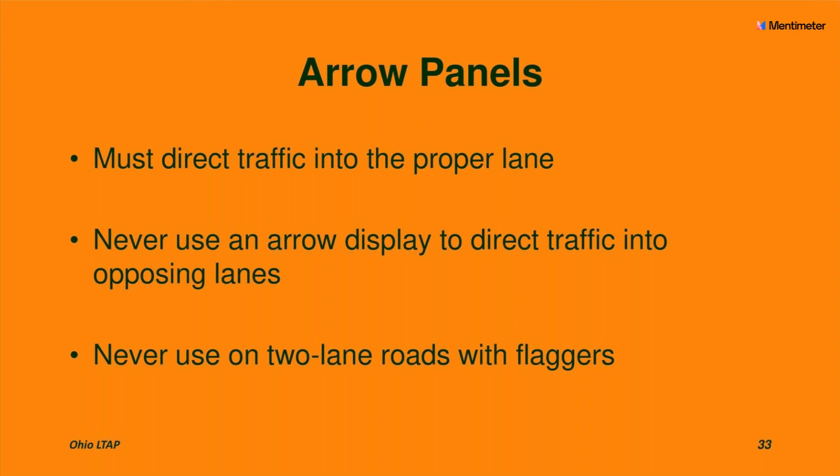Arrow panels are used in addition to channelizing devices and signs, and this is what we use to direct traffic into the proper lane. They're shown right on the typical application. As I said before, they're not shown on the flagging operation typical application, so we don't use them there.

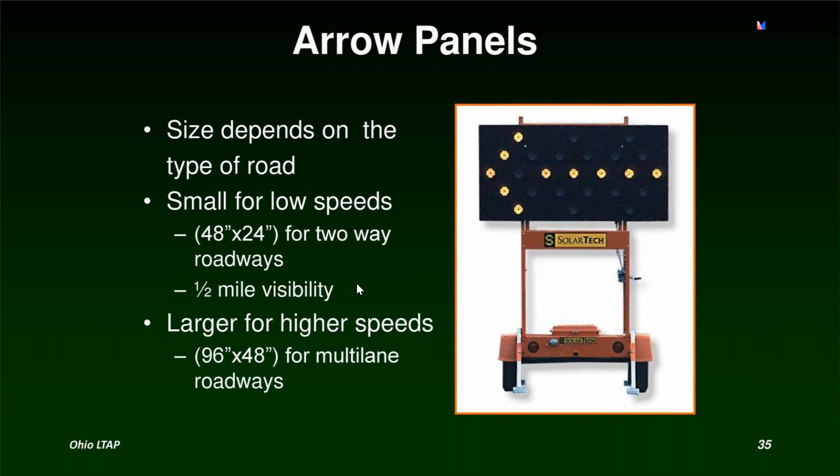These are used in multi-lane roadway situations, and we have different sizes: 48 by 24, maybe for two-lane roadways, and 96 by 48 for multi-lane highways. These are high intensity lights that can be seen from a minimum of a half mile away, and we dim them at night or during bad weather so we don't blind motorists.

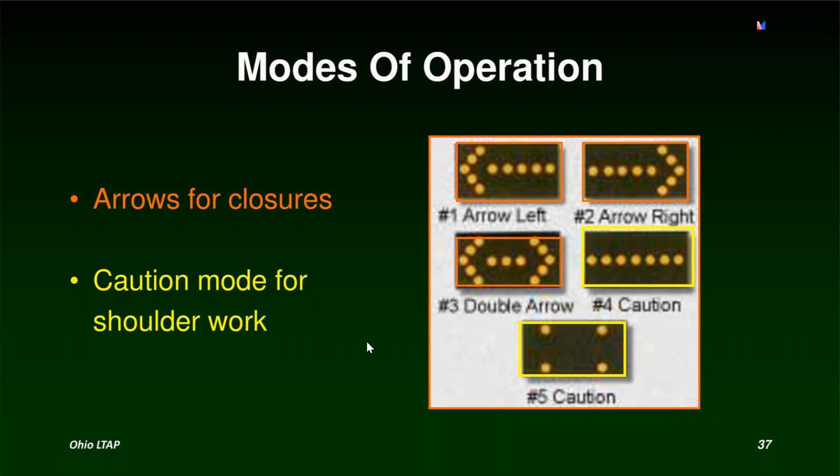When you buy an arrow panel, we want to make sure it does all of these operations: arrow left, arrow right, double arrow, and then there are two forms of lighting for caution, either the straight bar or the four corners.